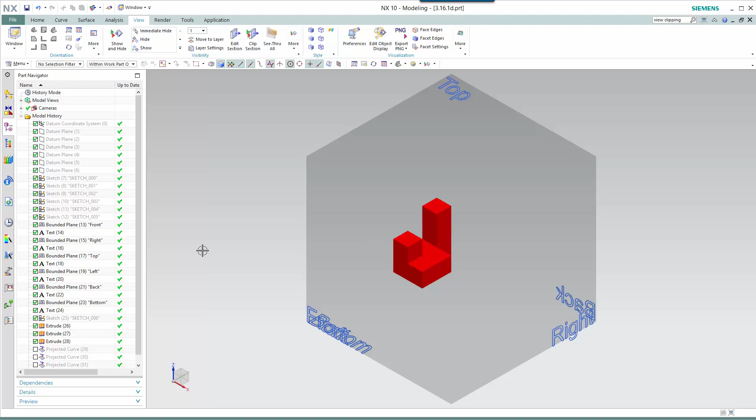All right, welcome back. What I'm going to do is first turn off the clipping plane so that we have the entire three-dimensional object or three-dimensional glass box showing. What I'm going to do is turn on the projection representing the front orthographic view. So you should at least have all of the green lines in your front orthographic sketch. If you've included the blue dashed lines, those lines show hidden edges or surfaces.

Next, I'm going to turn on the projection of the right side orthographic view. And once again, take a minute and check, making sure your sketch matches that of the green lines. And finally, here is the top orthographic view and what your sketch should look like. How did you do? Hopefully you got everything correct. Let's move on to another example.

Here we have another simple three-dimensional object. We're going to use it as our test vehicle. So we're going to turn off the clipping plane of the glass box. And once again, pause the video and take whatever time you need to draw the front orthographic view, the right side orthographic view, and the top orthographic view, including, if you choose, the hidden lines, the dashed lines that represent hidden surfaces. Remember, we're doing third angle projection. Pause the video.

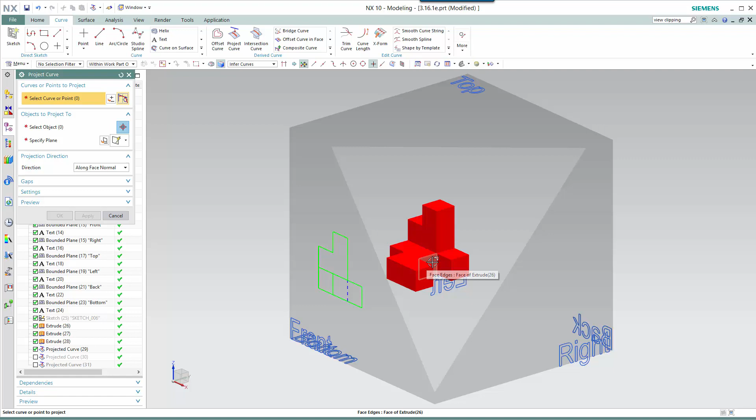Welcome back. Let's turn on the projection of our front orthographic view. Again, your sketch should at least match all of the lines represented in green. The blue dashed lines represent this hidden surface back inside there. I'll show you by hovering over it. So that surface that's highlighted in the back there happens to coincide with that blue line.

All right, what does the right side sketch look like? Again, all of your green lines need to be the same as mine. The blue dashed line, in this case, represents this hidden surface right there. And when you project it onto the right side view, you see it as an edge, but the edge is hidden, so you get dashed lines, not solid lines.

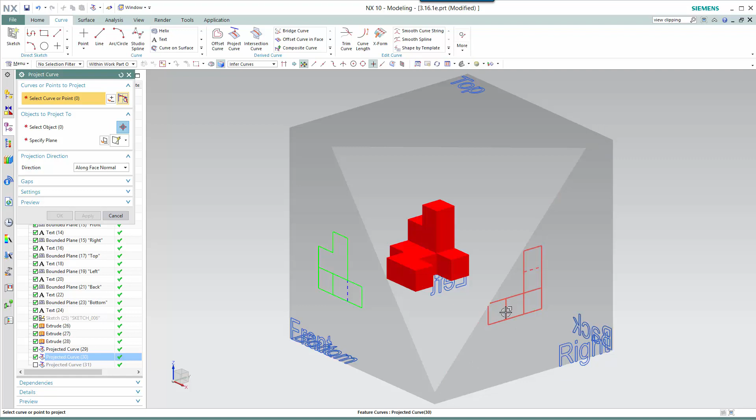I have a question for you. Some of you may have colored this line that my cursor is over as a dashed line. It represents this back surface. It also represents kind of the inside surface on this wall. They happen to lie on the same plane. Whenever you have something like that, you need to make sure that you give preference to the visible edge, and that's why this edge is green, not blue and dashed. So if an edge is hidden and that edge happens to coincide with a visible edge, then you always make sure that you show the visible edge as a solid line.

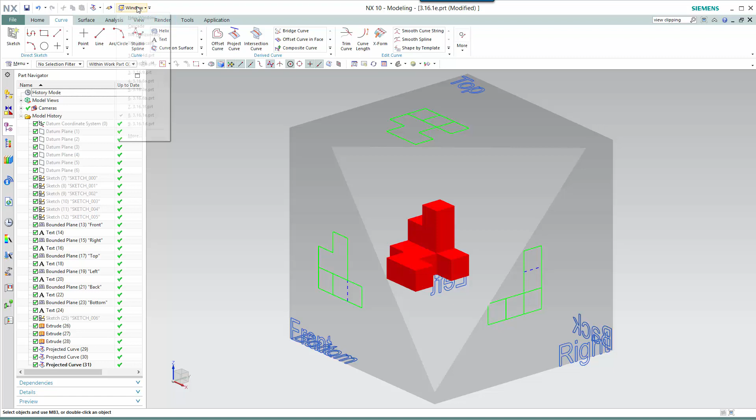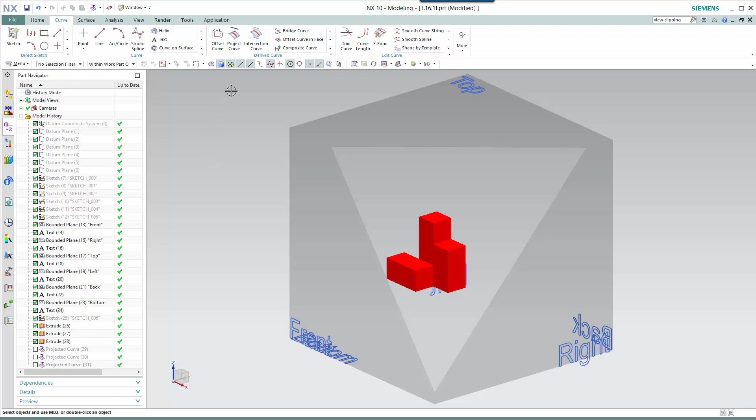Okay, off to the top view. So our top orthographic view should look something like this green set of curves up here on the top. All right, let's do one last projection as a quiz and see how you do. So here we have our simple shape. Again, pause the video, create a front orthographic view, a right side orthographic view, and a top orthographic view. Okay, pause the video.

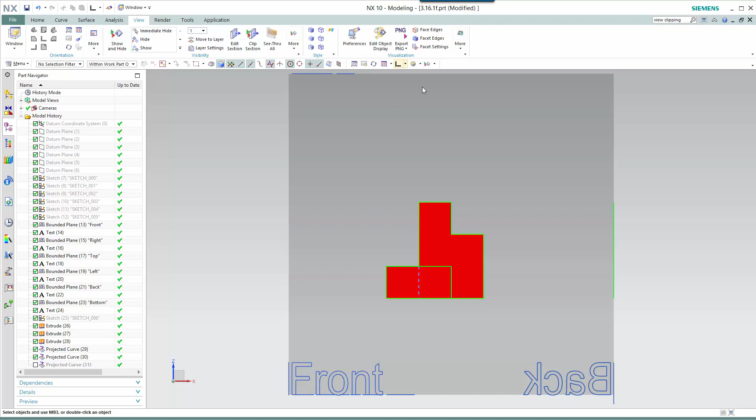All right, welcome back. So let's see how well you did. Here's the front view, and the front view in this case, if we rotate this around, should look something just like that. If we rotate around to our right side view, it should look like that. And if we rotate to our top view, the object should look like that.

Hopefully you have been successful in creating all of these orthographic views, and you're getting to the point where you can look at a three-dimensional object and project it into its corresponding orthographic views. Our next lecture, our next little video clip, will focus on some more complex shapes, and we'll see how well you do with your 3D to 2D visualization skills.